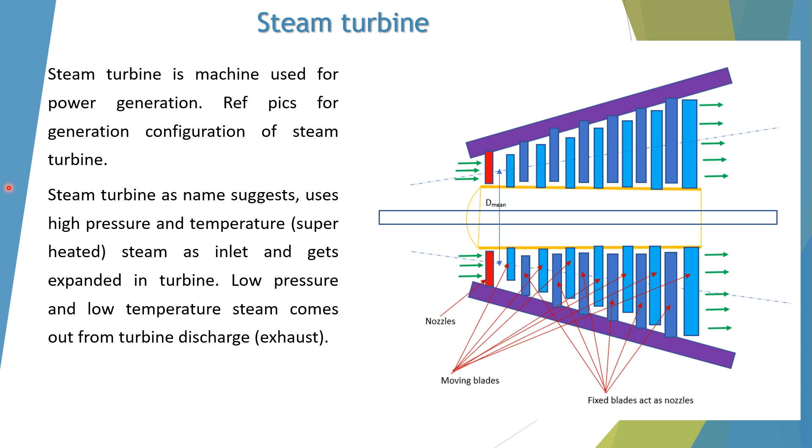So now a steam turbine is a machine used for power generation. You can see the configuration of a steam turbine here. A steam turbine, as the name suggests, uses high pressure and temperature, that is superheated steam, as inlet, and it gets expanded in the turbine. Low pressure and low temperature steam comes out from the turbine discharge or exhaust. The process of expansion of steam in the turbine is considered as an isentropic expansion process, where entropy of steam remains constant.

A steam turbine can be used for power generation as well as a driver to drive the compressor and pump, etc. When used for power generation, steam at turbine outlet is condensing type, where pressure is slightly lower than atmospheric, that is vacuum. Heat is removed in the condenser installed at turbine outlet. Outlet of condenser comes to the pump suction as water, because the steam has now converted into water, where the pump makes higher pressure to feed back to the boiler for steam generation.

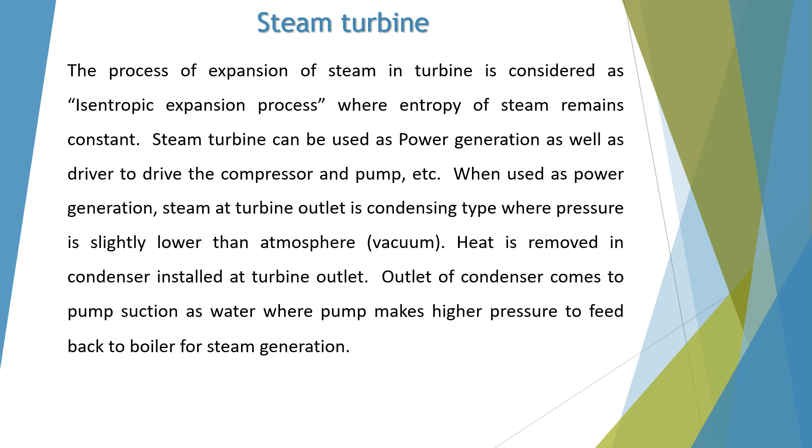In case of a steam turbine used as a driver, turbine outlet steam is lower pressure but non-vacuum and non-condensing type condition, which can be used in the plant process application. As the expansion of steam occurs in the steam turbine, the steam condition at turbine inlet should be superheated. Superheated steam, that is high temperature steam, at turbine inlet is required due to the fact that when the expansion occurs, there is a drop in temperature. And so higher temperature at inlet is a must to avoid liquid formation or condensation in the blade, which is detrimental for the machine.

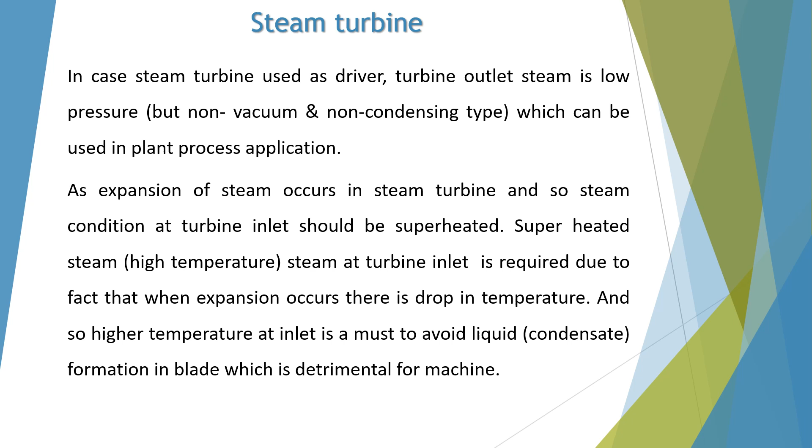Now steam turbine classification is done in two ways. One is based on application, another is based on the construction. As per the application, turbine is classified in two categories. One is called condensing type turbine, another is a back pressure turbine. Condensing type turbine is mostly used for power generation, and outlet pressure or exhaust pressure is in partial vacuum. And back pressure turbine is used as a driver for compressor and pump, etc. Outlet pressure, that is exhaust pressure, is lower but still in a superheated condition and above atmospheric pressure, and it is used in the process plant application.

Other features of a steam turbine are extraction type. In this feature of turbine, steam is taken from the various sections of turbine at different pressures for industrial application. Power generation is lesser due to less steam available for the downstream stages. Extraction of steam is done to get different pressures of steam, like high pressure steam, that is HP steam, medium pressure steam, that is MP steam, and low pressure steam, that is LP steam, because these steam conditions are required for the plant application.

And reheat feature: in this feature of turbine, steam from the high pressure section of turbine is taken out and fed back to the boiler for heating, that is superheated, and then comes to the intermediate section of turbine. This is done to avoid condensation in the last stage of the blade. This is used for power generation application.

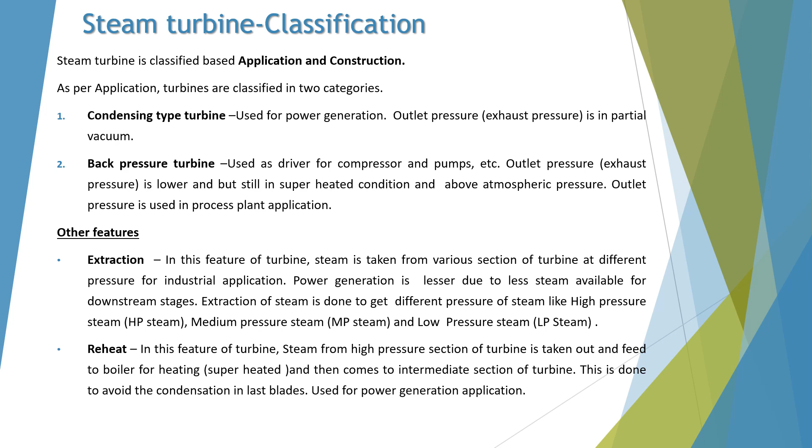Now, Rankine cycle for condensing type turbine. So you can see this. This is a steam turbine. This is a condenser. This is a pump, feed water pump, and this is a boiler or a steam generator. So process 1 and 2 is isentropic or adiabatic expansion in the turbine. This is process 1 and 2.

Process 2 and 3 is a constant temperature, that is isothermal, and constant pressure, isobaric, heat rejection in the condenser. And process 3 and 4 is a constant volume, that is isochoric, compression by the pump, that is pressure rise occurring from 3 to 4 by the feed water pump. This is liquid state. Now process 4 and 5 is constant pressure heat addition in the steam generator.

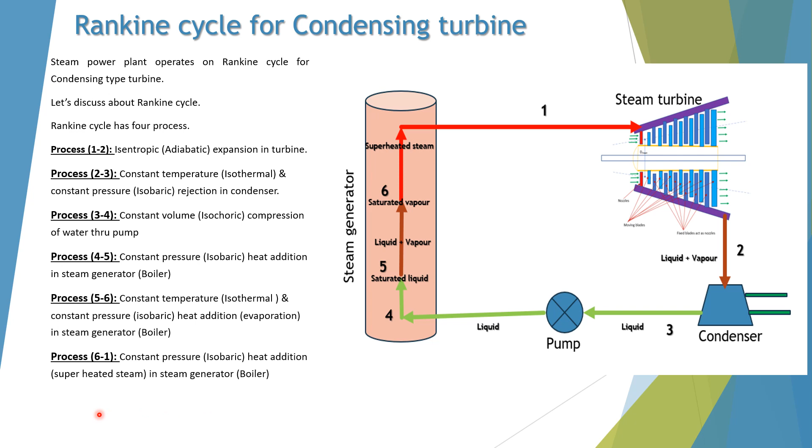Then process 5 to 6 is a constant temperature and constant pressure heat addition, that is evaporation in the steam generator or boiler. And process 6 to 1 is the constant pressure heat addition, that is superheated steam in the steam generator or boiler. So these are the processes for Rankine cycle.

There's another view we can show of the Rankine cycle on a pressure versus volume diagram. X-axis is volume and Y-axis is pressure. So the same process is shown in another form, that is the PV diagram. Process 1-2 is the isentropic expansion in the turbine. Process 2-3 is constant temperature, constant pressure heat rejection in the condenser. Process 3-4 is constant volume, pressure rise in the feed water pump.

And process 4-5 is a constant pressure heat addition in the boiler or steam generator. Process 5-6 is a constant temperature, constant pressure heat addition in the boiler. And process 6-1 is a constant pressure heat addition, that is superheated steam in the steam generator. So this is the Rankine cycle on a PV diagram.

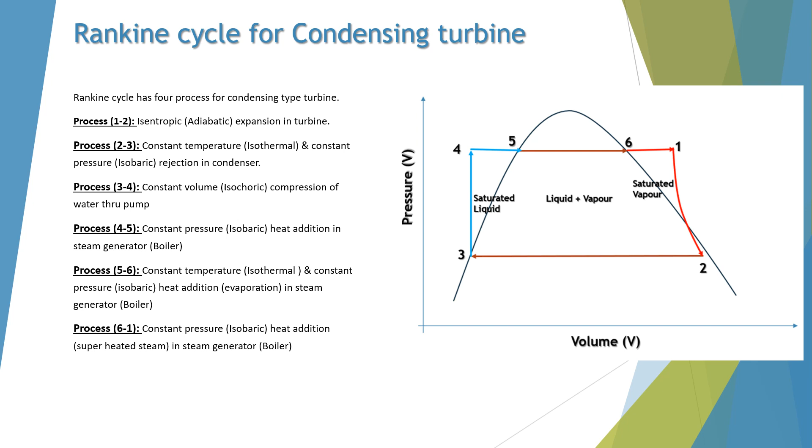Now there is another application, that is a Rankine cycle for a back pressure steam turbine. So in this cycle, process 1-2 is an isentropic expansion in the turbine, and then it goes to the plant process. For process 3 and 4, we need a separate DM water supply, so that through the feed water pump the pressure rise occurs from 3 to 4 at constant volume.

Then process 4-5 is a constant pressure heat addition in the boiler, and process 5-6 is again constant temperature and constant pressure heat addition, that is evaporation in the boiler or steam generator. And process 6-1 is constant pressure heat addition, that is superheated steam in the steam generator. The only difference between condensing and non-condensing is that points 2 and 3 are not connected in back pressure, whereas in condensing 2 and 3 are connected.

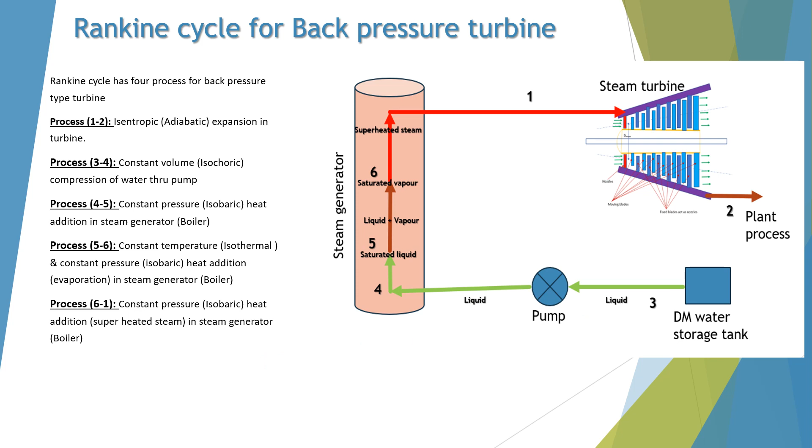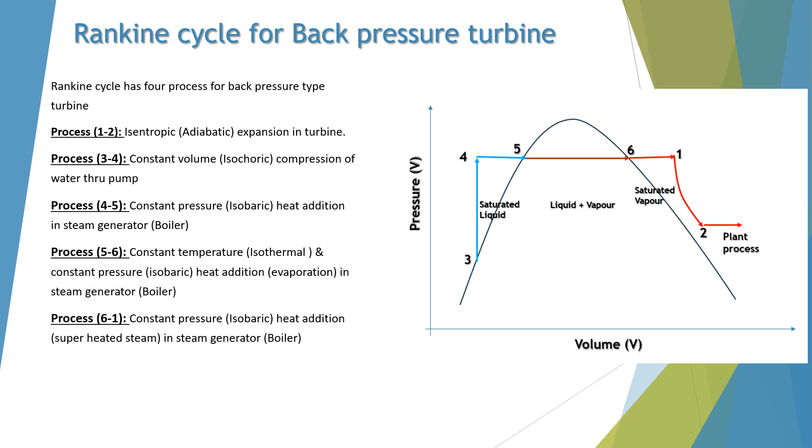Process 5-6 is a constant temperature, constant pressure heat addition, that is evaporation in the steam generator. And process 6-1 is a constant pressure heat addition, that is superheated steam in the steam generator. So this is another way to show the back pressure Rankine cycle on a PV diagram.

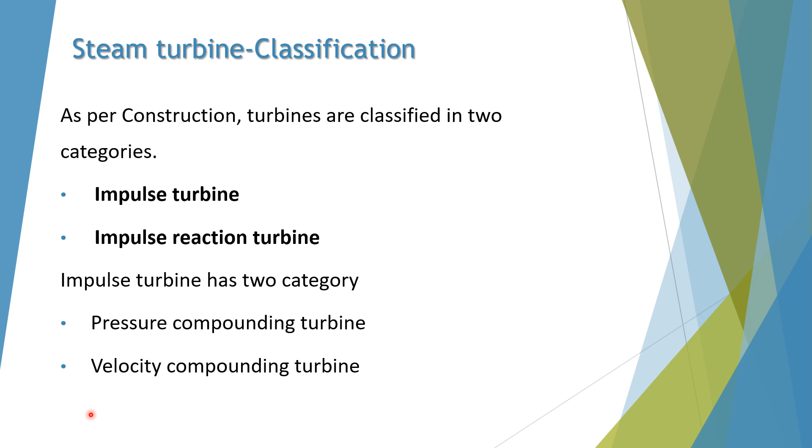Now, steam turbine classification based on construction. Broadly, it has two categories. One is called impulse turbine, another is impulse-reaction turbine. The impulse turbine has two subcategories: pressure compounding turbine, which is an impulse turbine, and velocity compounding turbine, which is again an impulse turbine.

In the case of the pressure compounding impulse turbine, we have the single stage impulse turbine, that is De Laval or Rateau single stage, and the multi-stage impulse turbine, which is a Rateau turbine. The velocity compounding impulse turbine is the Curtis wheel turbine, and the impulse-reaction turbine is a multi-stage impulse-reaction turbine, that is a Parsons turbine.

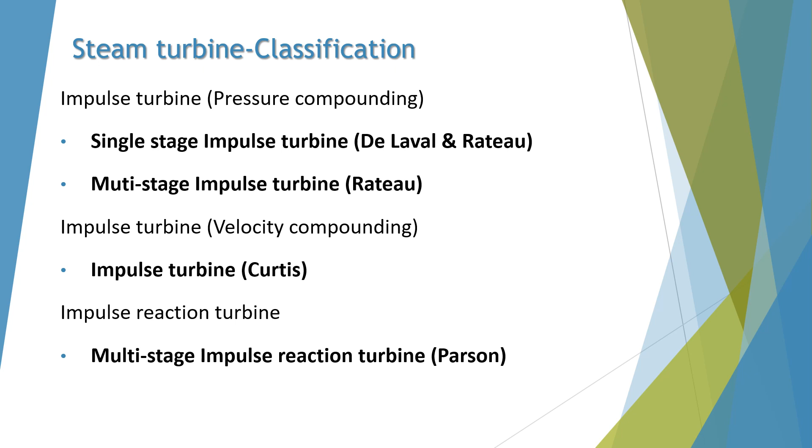So I hope you have enjoyed and understood the basic working principle of a steam turbine and Rankine cycle, broadly how the Rankine cycle is used for condensing and non-condensing applications, and the classification of steam turbines.